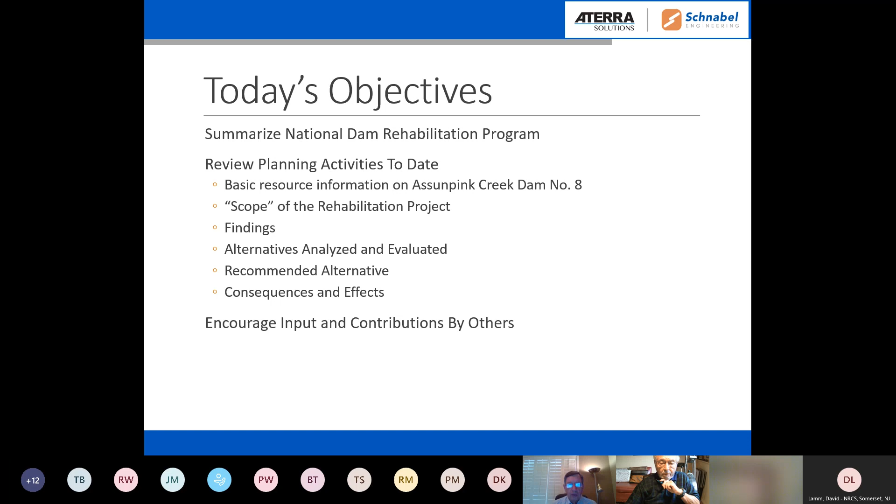We will have ample opportunity for input and contributions by others. As mentioned, the key players in the planning process include 6 actual local sponsors of the overall Assunpink Creek watershed. Hamilton Township is the lead for this particular dam, but there are also the Mercer County Soil Conservation District, Freehold Soil Conservation District, Mercer and Monmouth County, and the New Jersey Department of Environmental Protection, all active participants as sponsors of this project.

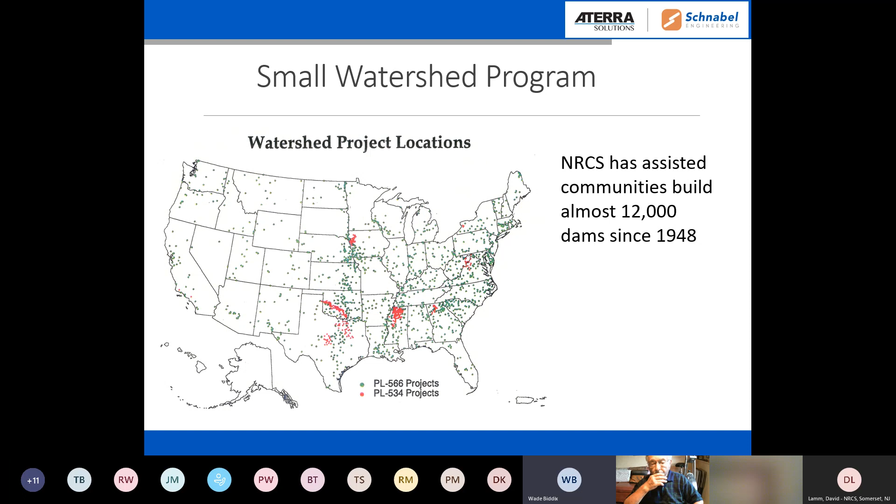Rehabilitation would be defined as extending the service life of the dams to meet safety and performance standards, prolonging beyond the original life, replacing deteriorating components, making repairs after catastrophic events, upgrading to meet dam safety laws, or potentially removing the dams altogether.

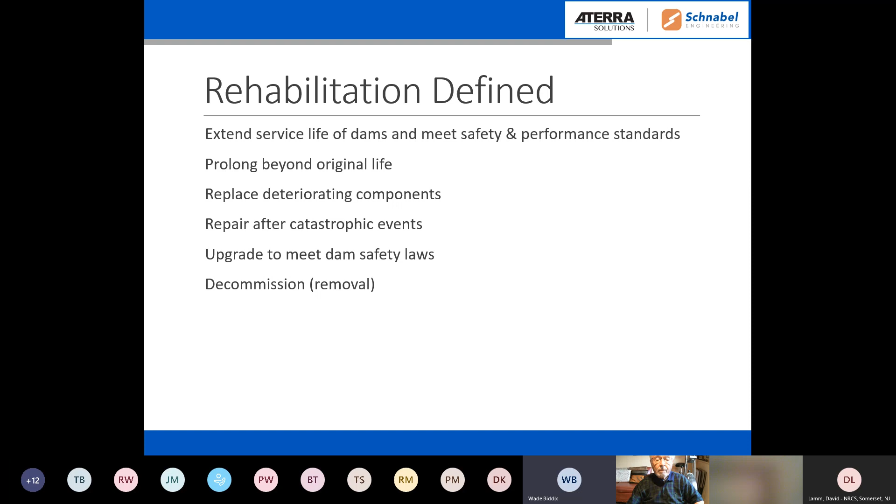The only dams eligible for rehabilitation under these programs are those originally built with either the Soil Conservation Service, which transformed into the Natural Resources Conservation Service within the U.S. Department of Agriculture.

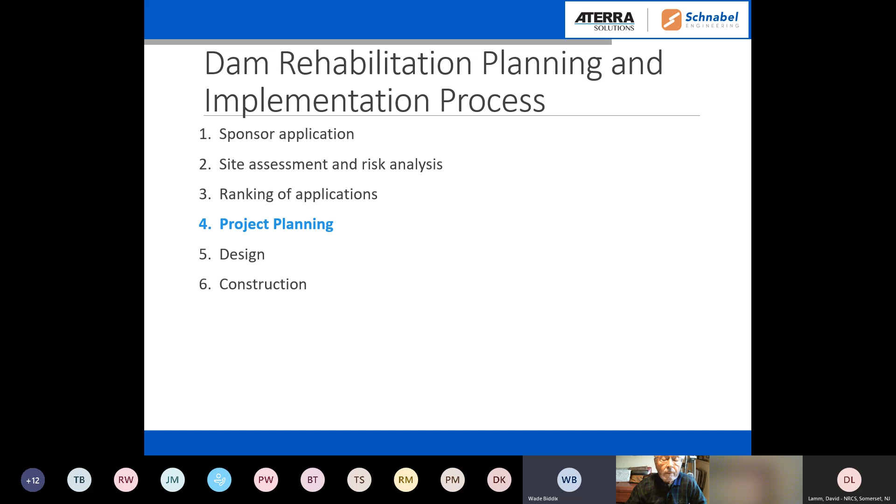The rehab planning and implementation process involves, as Dave mentioned, an application, a site assessment and risk analysis, a ranking of those applications, and then hopefully funding, moving into project planning and onto design and construction. We're well into this process, and hopefully we'll be able to complete a plan in the near future.

The cost share—Rich mentioned this a little bit, but to bring out the details—USDA Natural Resources Conservation Service funds 100% of the planning costs, so all planning costs are federally funded, and 100% of design costs, and then 65% of the total project cost, not to exceed 100% of the construction cost. So all NRCS staff costs are paid 100% by NRCS. The local sponsors' funds are 35%, which can be cash or in-kind credit. The only thing they have to pay up front without federal assistance are the permit costs.

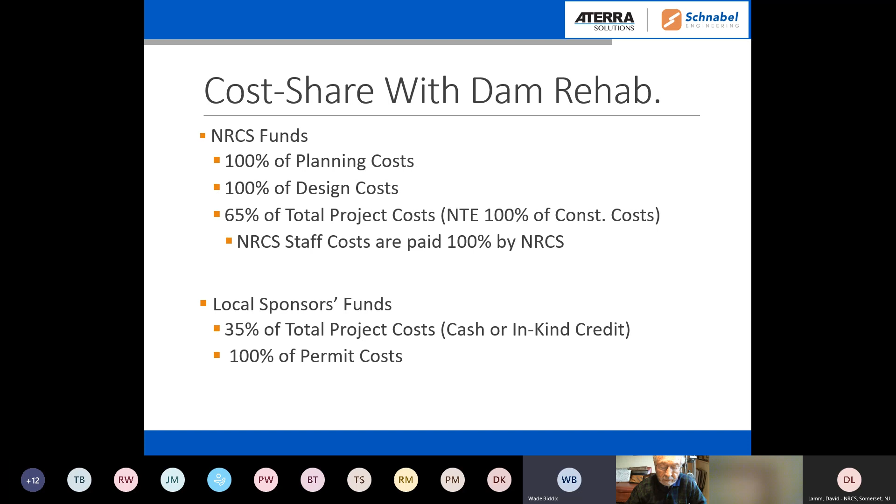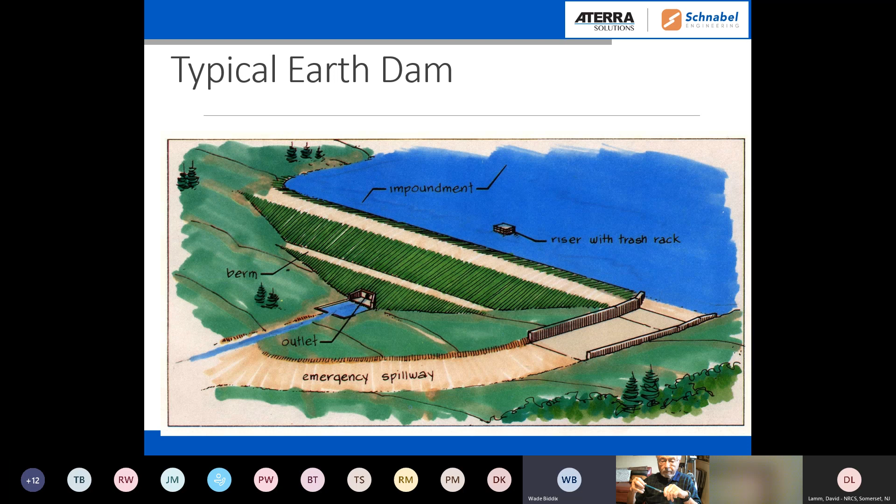Just so we're all on the same page talking about dams, I wanted to cover a little bit here. A typical earthen dam: the impoundment is basically the reservoir, or the permanent water that's out there. You have a riser with a trash rack normally, and then an embankment, a berm, an outlet, and an emergency spillway. The emergency spillway is basically the safety notch around the dam so the dam does not overtop in storm events.

Here's another depiction of that, just a typical cross section. The sediment storage is basically your normal pool—that's the area that would have your normal reservoir water. Then you have the flood storage that's up to the crest of the auxiliary spillway, and then the top of dam—you do not want the dam to overtop the embankment. Then you have a principal spillway pipe that goes through the embankment and exits and outlets downstream. So that's what we're talking about.

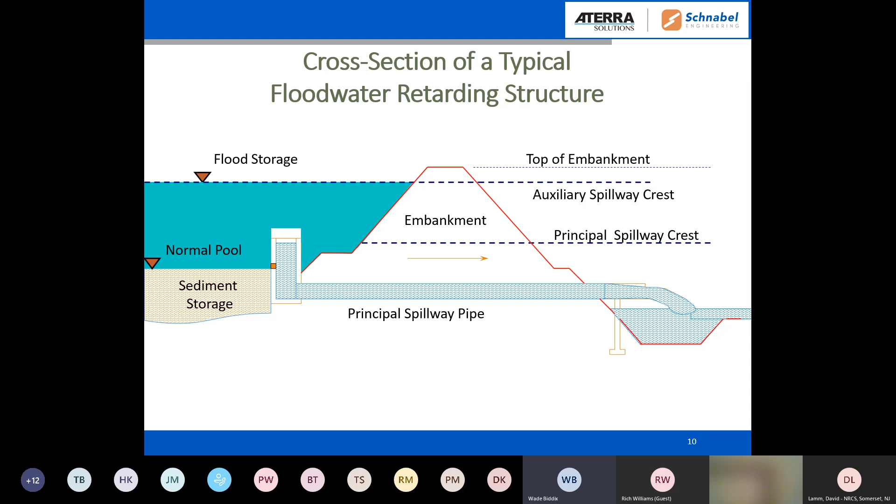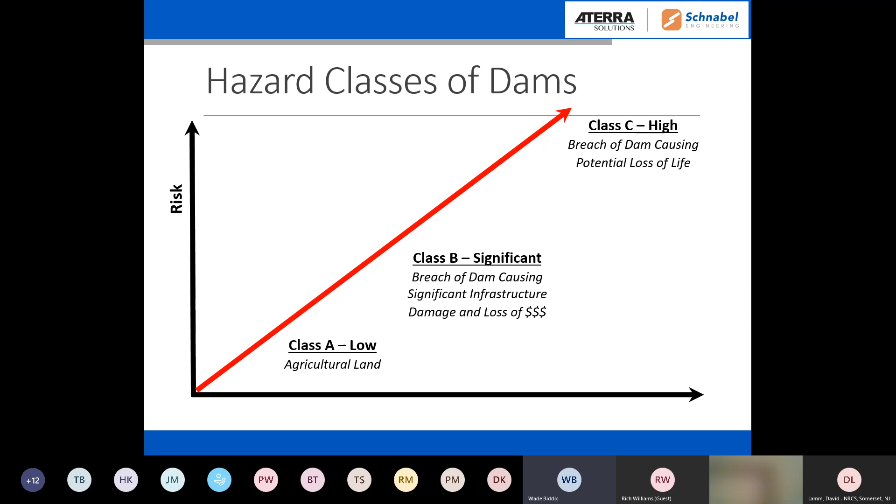As far as hazard classes of dams, on the left the risk goes up as the class of the dam goes up. So it's A, B, C, with A being low hazard, with failure primarily impacting agricultural lands or rural areas. Class B, or significant hazard dams, would cause some infrastructure damage and loss, but Class C, a high hazard dam, would basically cause potential loss of life during a breach. So this dam is classified as a high hazard dam.

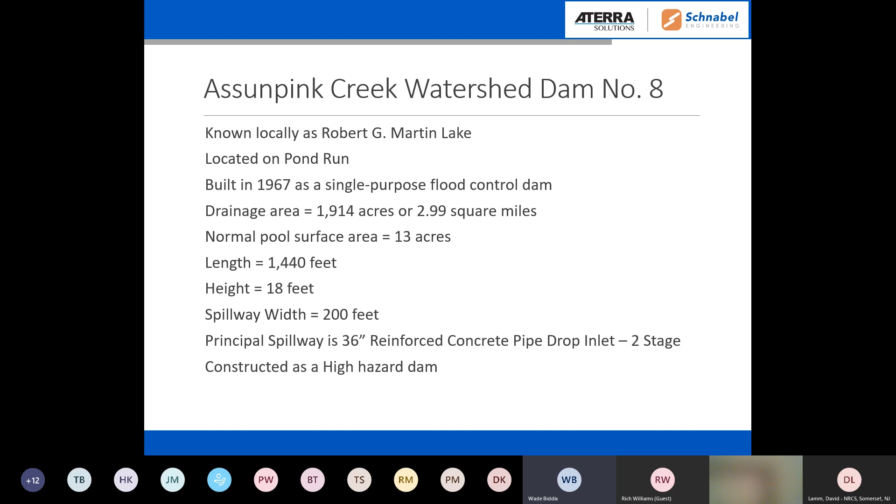Some statistics on the dam: it's known as the Robert G. Martin Lake, located on Pond Run, built in '67 as a single-purpose flood control dam. Some of these dams are built with other purposes such as water supply, recreation, or irrigation water. The drainage area is 1,914 acres, or almost 3 square miles, with 13 acres of surface pool—that's normal pool—and it's 1,440 feet long. The dam height is about 18 feet tall, with an emergency spillway that's 200 feet wide, and a 36-inch principal spillway pipe going through the embankment. It was constructed as a high hazard dam.

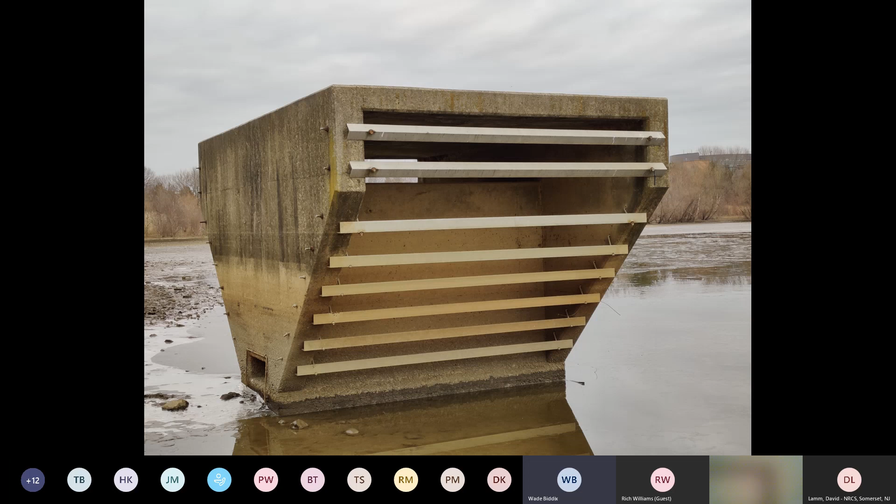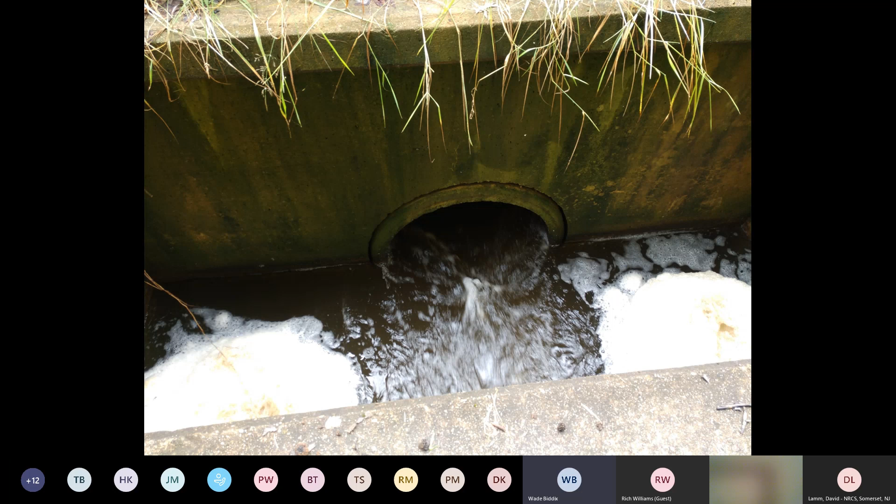Just some slides of the dam for those who may not be familiar with it. This is standing on the dam looking at the riser and the permanent pool or reservoir. Here's a closer view of the reservoir, and there's a little gazebo between the embankment and the auxiliary spillway. This is the outlet pipe below the embankment, which exits downstream.

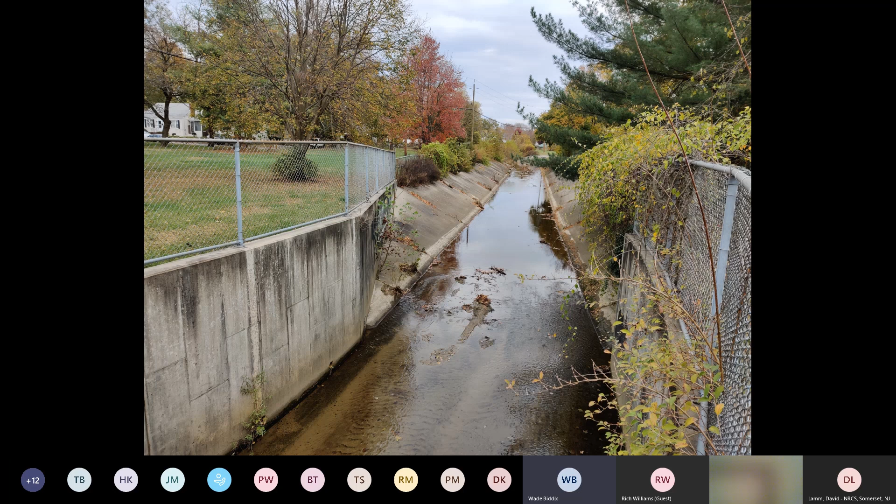This is the 200 feet wide auxiliary spillway, and that's the safety notch around the dam. This picture shows the concrete channel improvements downstream. As Dave mentioned, there's about two miles of concrete channel work also associated with flood control in this watershed.

Regarding the condition or current status of the dam, it's inspected annually and regularly mowed and maintained, so the town is doing a nice job of that. Breach inundation mapping was done back in 2015 by Civil Dynamics, and the assessment done in 2017 found two primary issues that needed to be addressed: the auxiliary spillway has insufficient capacity, and it is susceptible to erosion during design flow events.

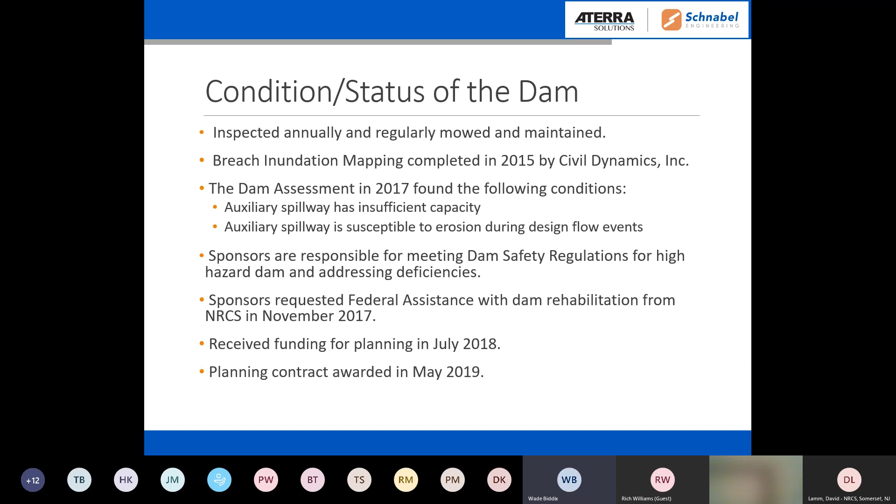The sponsors are responsible for meeting the dam safety regulations for high hazard dams and addressing these deficiencies. So New Jersey's dam safety folks are looking at these types of dams and saying you need to bring them up to current standards. Sponsors requested federal assistance in 2017, funding came in 2018, and the contract was awarded for planning in May of last year.

When we enter into a project, we take a look at all the different environmental laws and executive orders and so forth. The scope of a project is basically defined by the Council on Environmental Quality as the range of actions, alternatives, and impacts that will be considered in a planning project. So scoping is used to identify the significant issues to be analyzed in detail and to eliminate from study the issues that are not significant. We don't want to just be studying everything; we've got to narrow it down into what's actually relevant to the project.

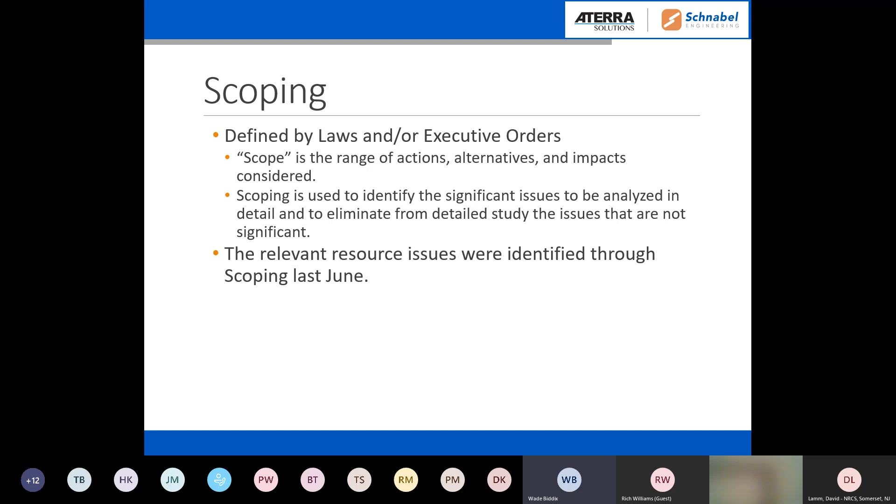Back in June of last year, we had a meeting in the town center and identified, through scoping, the relevant resource issues to be studied in detail. We grouped those into resource concerns for soil, water, air, plants, animals, and humans, asking the question: is it relevant, yes or no, to the proposed action? Now I'll go through some of those findings in relation to the resource issues considered significant during scoping.

Some environmental findings—thanks to ERM and EA for their work on the environmental analysis, digging through different databases for this information. The soils: prime farmland soils and soils with statewide importance are in the project area. I've highlighted 'project area' because there's an area of initial assessment when you start these things, and then we narrow that down to what we consider the limits of disturbance. Initially you look at the overall watershed, upstream and downstream—that's the project area—but the limits of disturbance will be a smaller area. You'll see that term come up later.

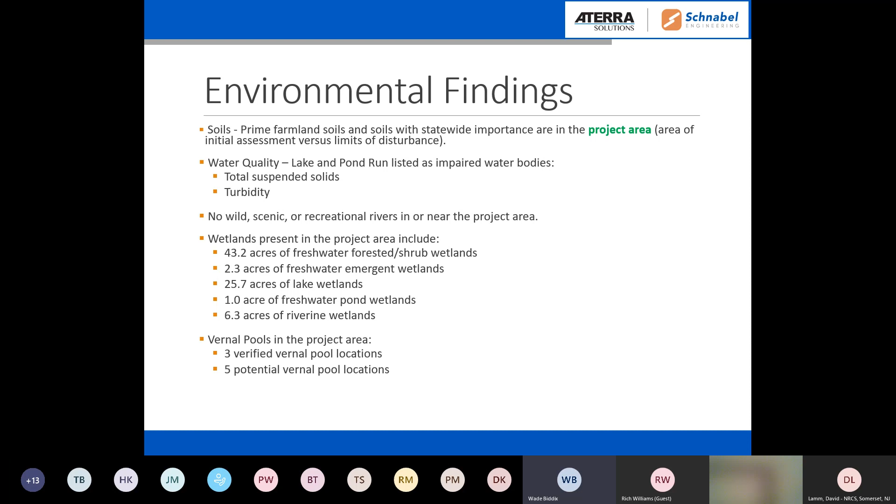Water quality: the lake and pond run are listed as impaired water bodies by the state for total suspended solids and turbidity. There are no wild, scenic, or recreational rivers in or near the project area. There are quite a few wetlands present in the area, with a breakdown of the different types and acreages. There are three verified vernal pool locations in the vicinity and five potential pool locations. The dam is within the interstate coastal zone under New Jersey's Coastal Zone Management Program, but the project site is not influenced by tidal areas.

The floodplain is listed by FEMA as a special flood hazard area, and the air quality does not meet the pollutant standard for ozone, making it a non-attainment area. For plants, there are no federally threatened or endangered plant species in the project area, and no state-listed endangered plant species. Regarding noxious weeds and invasive plant species across the entire state of New Jersey, there are 5 prohibited weed species and 19 restricted weed species.

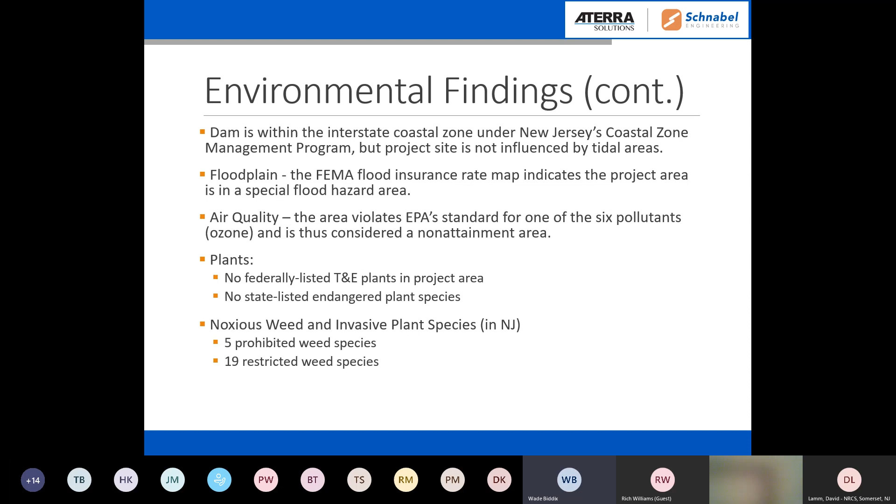No unusual fish and wildlife. Animals, the only thing we found is one federally listed T&E species, the northern long-eared bat, but that's typical for most areas in the whole Northeast. So that's not unusual to find that come up and be flagged. And again, the statewide database for species: several bird species are either endangered, threatened, or special concern, and there are 8 reptile and amphibian species that are species of special concern.

And some volunteers in the area have observed 2 species of special concern, Fowler's toad and eastern box turtle. And there's also prime habitat for the endangered wood turtle. But keep in mind that a detailed site assessment was not conducted overall. A lot of these are desktop kind of analyses to determine what we should expect in the general area.

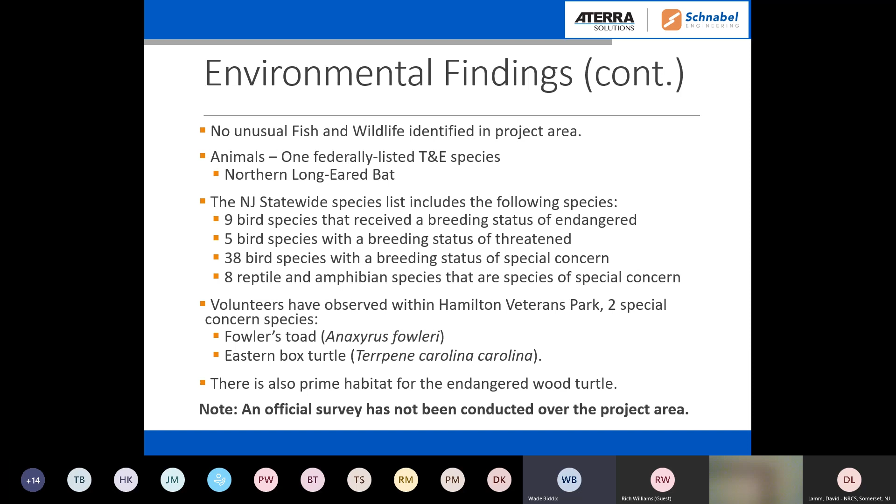Continuing on with this, no known invasive fish or wildlife species upstream of the impoundment within Pond Run or Veterans Lake. Bald eagles have occasionally been observed, but we did not find any nest sites within the project site.

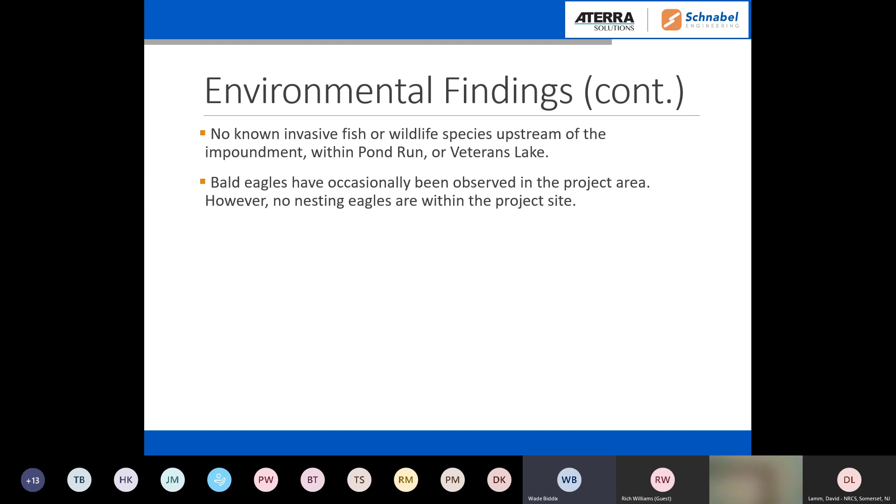Social and cultural resources. There are 2 historic districts, 5 historic properties, and at least 11 archaeological resources within a 2-mile radius of the project area. Consultation will be initiated soon with the various federal and state environmental agencies using the limits of disturbance. Following this meeting, these letters will be going out to the federal and state environmental agencies.

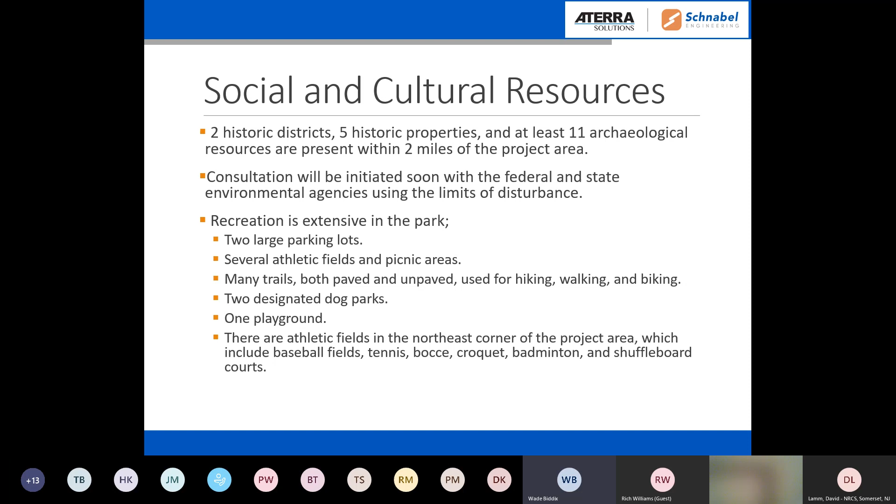Recreation, we found, is extensive in the park. Anytime you go out there, you can see that it's being extensively used. 2 large parking lots, athletic fields, picnic areas, biking, hiking trails, dog parks, playgrounds. It's very heavily used. The dam is located in the middle of the park, and it is not a federally designated park or natural area, but it is listed on the New Jersey Trails Association webpage as one of the great trails in New Jersey. So it is significant from a local use standpoint.

The visual aesthetics and scenic beauty of the park, we know, have impacts on tourism, recreation, and resident satisfaction. There is value associated with the dam and the lake for scenic beauty and outdoor activities.

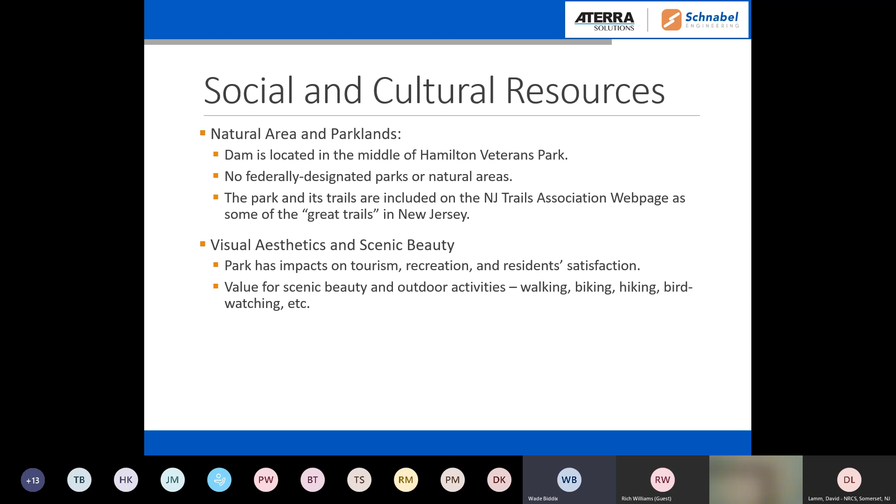The watershed was modeled with the dam in place and the dam removed. So here's what we found regarding the flooding impacts to downstream properties. Right now, there are 853 houses and 4 apartment complexes downstream of the dam, 49 commercial buildings, and 10 public buildings, for a total of over 900 buildings impacted by flooding in those downstream properties.

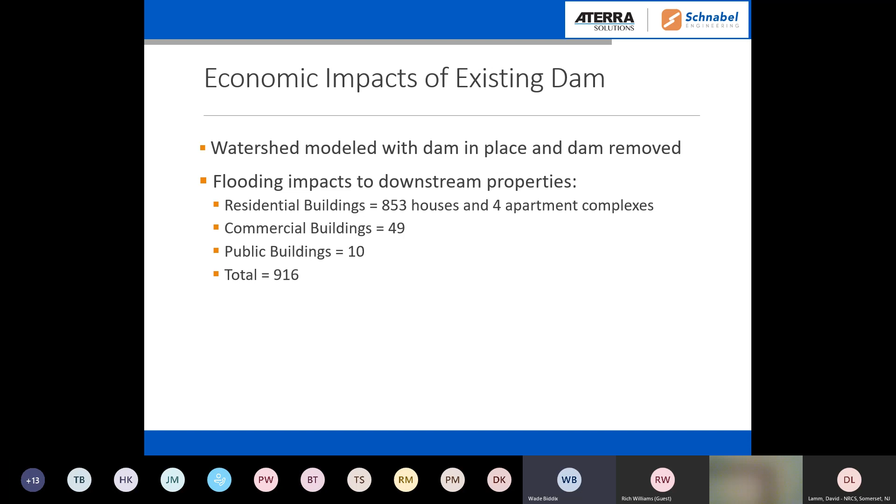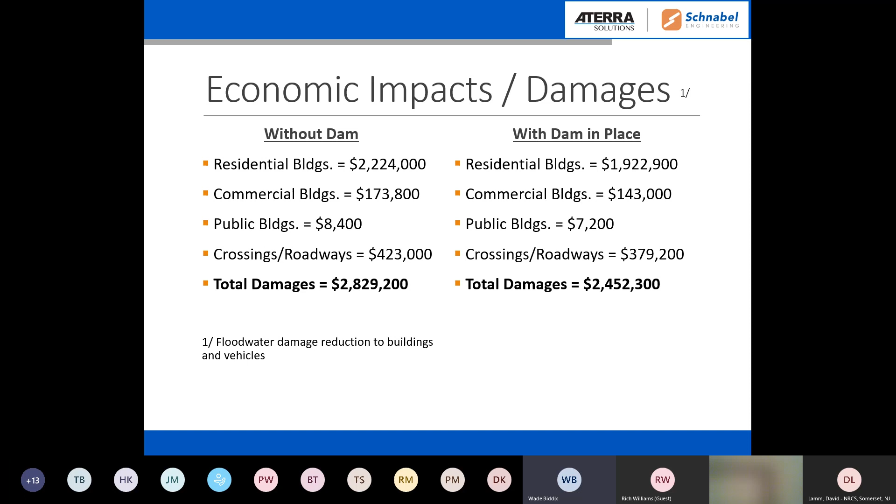So if you compare that, without the dam there's a lot more damages than with the dam in place. There's still damages, and we're primarily talking about all flood events. So these can be to different buildings, roads and crossings. It also includes any vehicles that would be parked in those areas downstream.

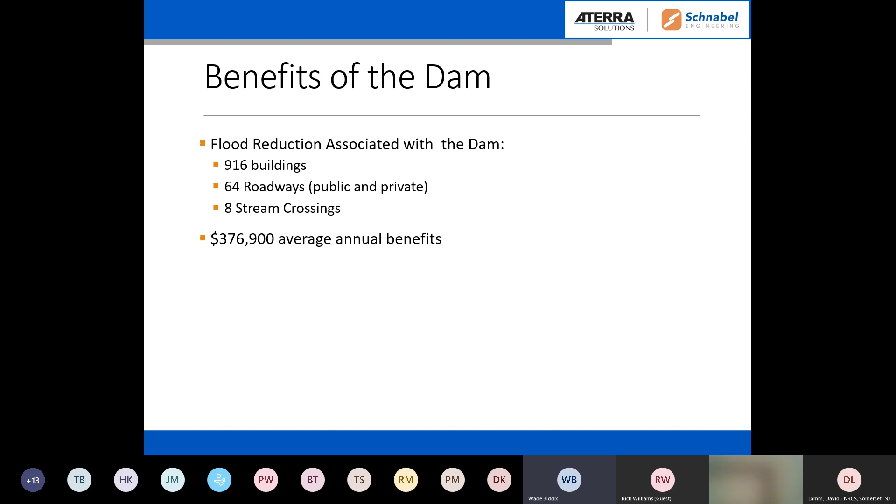So the benefits of the dam right now, you're getting flood reduction to those 916 buildings, 64 different roadways, public and private, and 8 stream crossings. So there's almost $400,000 average annual benefits associated with this dam.

So now I'm going to turn it over to Peter Maspus with Aterra Solutions, and he's going to take control and talk more specifically about the modeling and the work done on the dam upstream and downstream. All right, sounds good. I have control now, so I'll move forward and discuss some of the analyses that we performed as part of this project.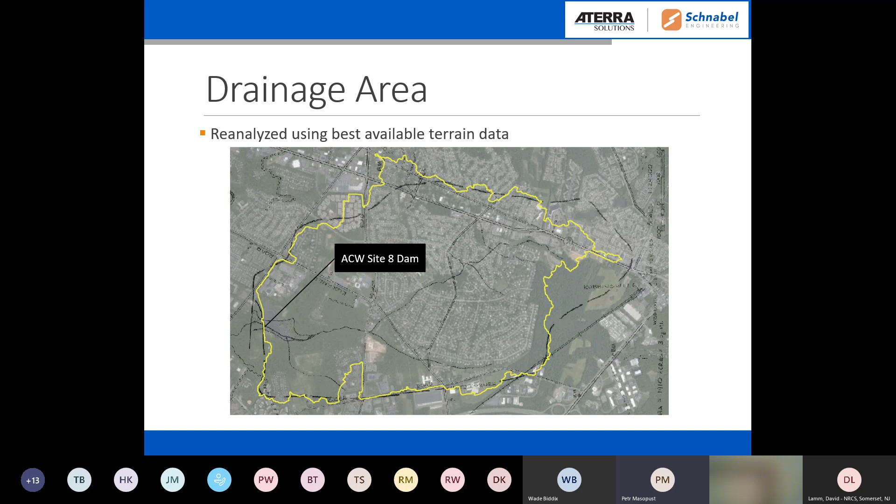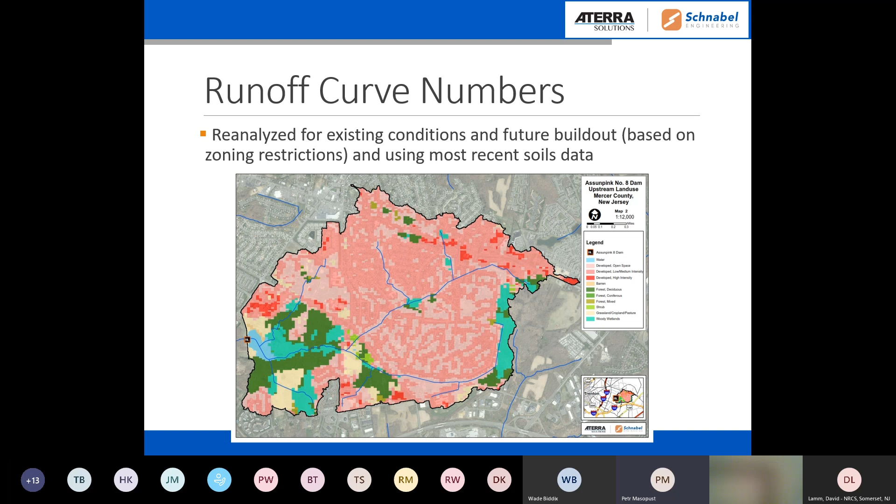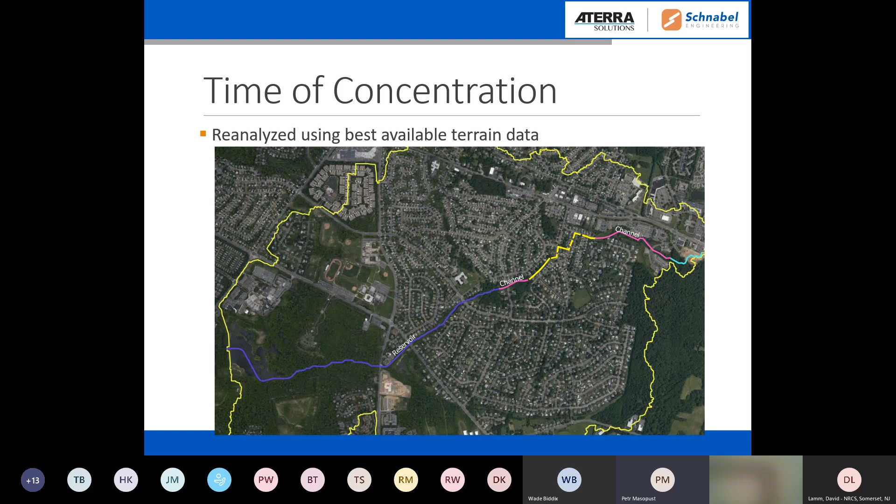We also looked at runoff curve numbers, which essentially define how much volume is conveyed to the dam from the watershed. We looked at existing conditions and also future build-out conditions, which were calibrated based on land use or zoning restrictions in the watershed. We evaluated time of concentration because the watershed is a lot more urbanized than it was back in the 60s when the dam was constructed. So that shows the longest flow path, essentially from the headwaters all the way to the dam.

And we also obviously looked at rainfall data and other parameters that may have changed since the time the dam was constructed. And the results of the analysis showed that several NRCS criteria are not met, and confirmed that the dam is in need of rehabilitation.

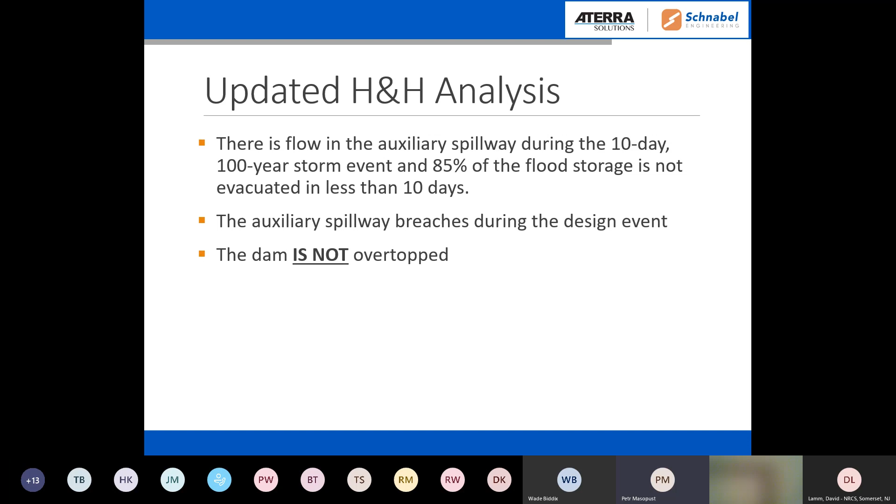Good news is that the dam is not overtopped during the design event. So that kind of drove our analysis or alternatives evaluation. But we confirmed that the auxiliary spillway breaches during the design event. And we also confirmed that one of the NRCS criteria for principal spillway capacity and flood storage are not met. So that also needed to be addressed as part of the rehabilitation design.

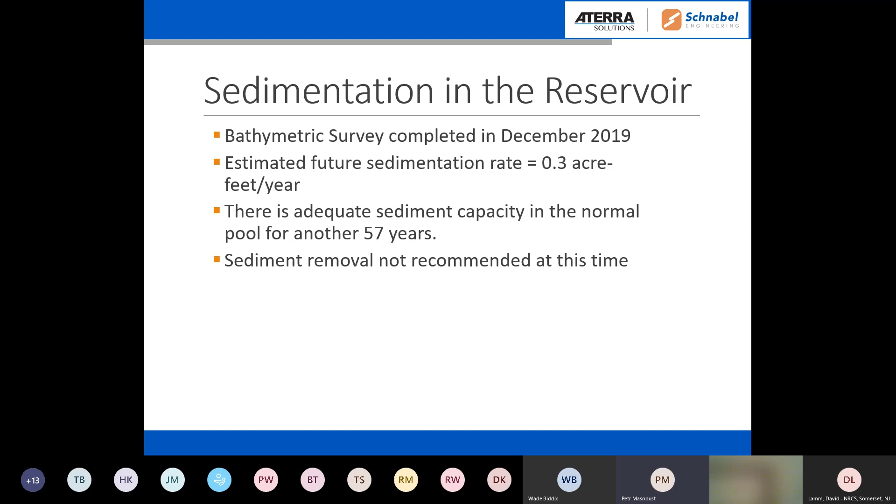We also performed a bathymetric survey and sediment survey in the reservoir to evaluate the current stage storage relationship, and to also see whether the dam has capacity for future sedimentation. And the results of the survey showed that there is additional capacity for at least another 57 years, and therefore we're not recommending sediment removal at this time.

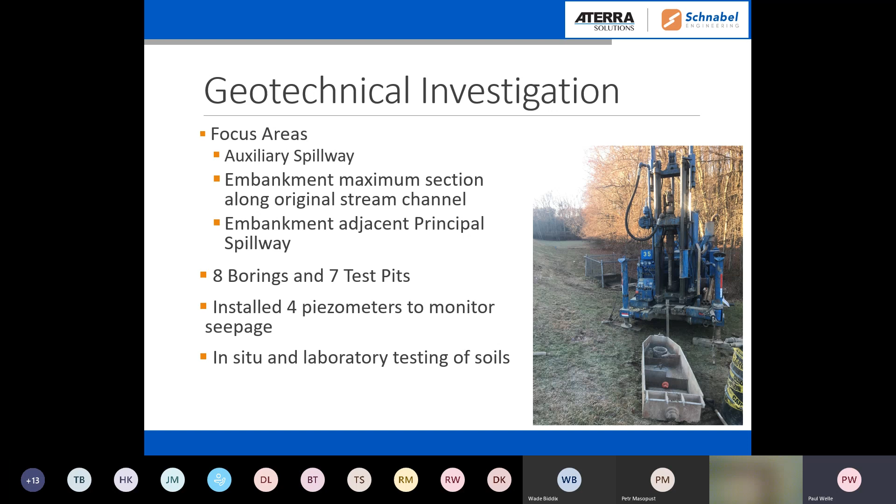And we took the results of that, some of which we actually did some testing in the field and additional testing in a laboratory. After we had all the test results, we performed a geotechnical analysis. One of the things we looked at is what we call the filter compatibility. We have toe drains or embankment drains near the toe of the dam. And that's because most dams have some type of seepage through the dams. The question is how much. Now, these toe drains are intended to intercept any seepage through the embankment so that it would not cause any problem as far as stability of the dam.

And one way to keep the soil from moving through these filter drains is to have a 2-stage toe drain filter. These stages of sand and gravel are intended to keep the soil where it's at, but still allow the water to flow through it. We found that this filter drain system meets the criteria that was in existence at the time the dam was originally built. The criteria have become more stringent, but it still meets the older criteria, even though it would not meet the existing criteria. But from what we can see, it appears that these filter drains are functional, and as a result, we do not consider repair to them to be warranted.

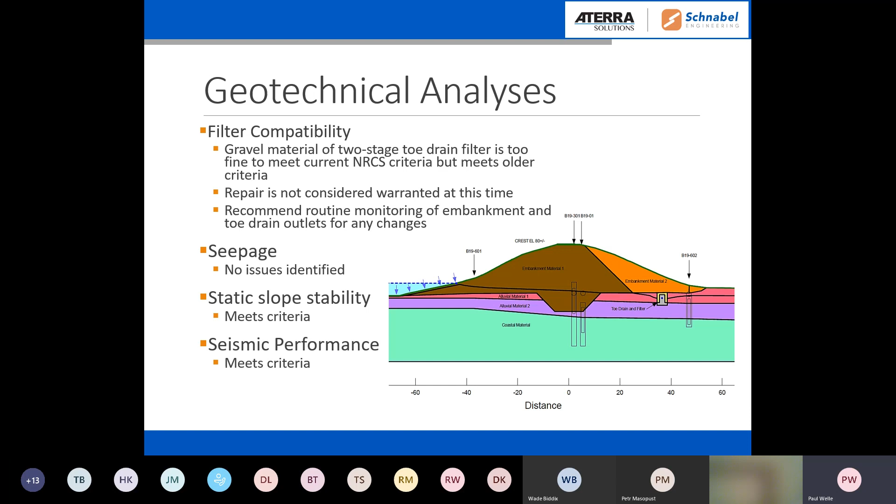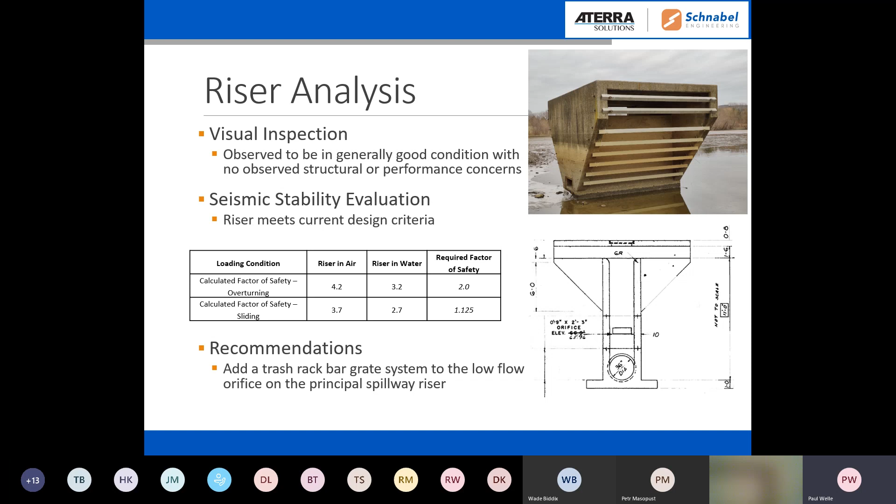We do have one recommendation. If you see on the left-hand side, just above the water, you see a rectangular opening or orifice. And this is what maintains the water at the normal pool elevation. And we do recommend that a trash rack be installed on there so that trash would not get into the riser and cause any plugging of the riser itself.

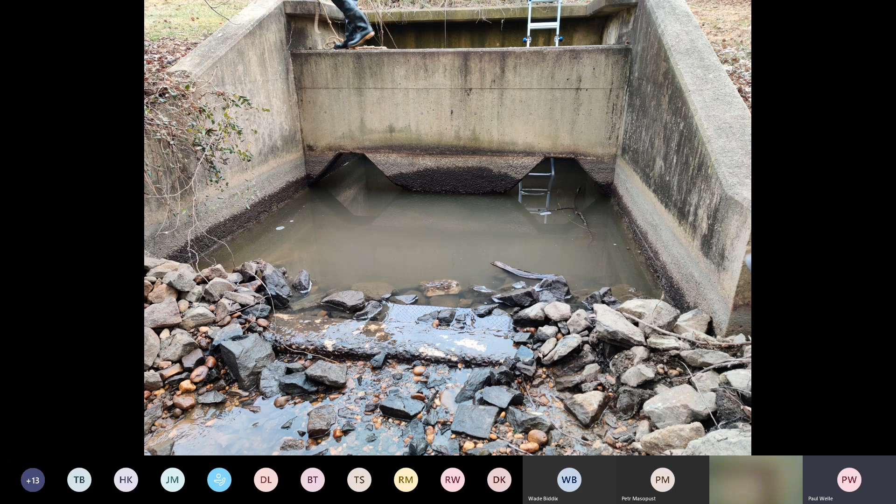This is the impact basin or outlet of the principal spillway conduit. It is a concrete structure that is in good condition. You do see, though, that in the stilling basin in the foreground, you see some riprap in that stilling basin, and that riprap should be removed.

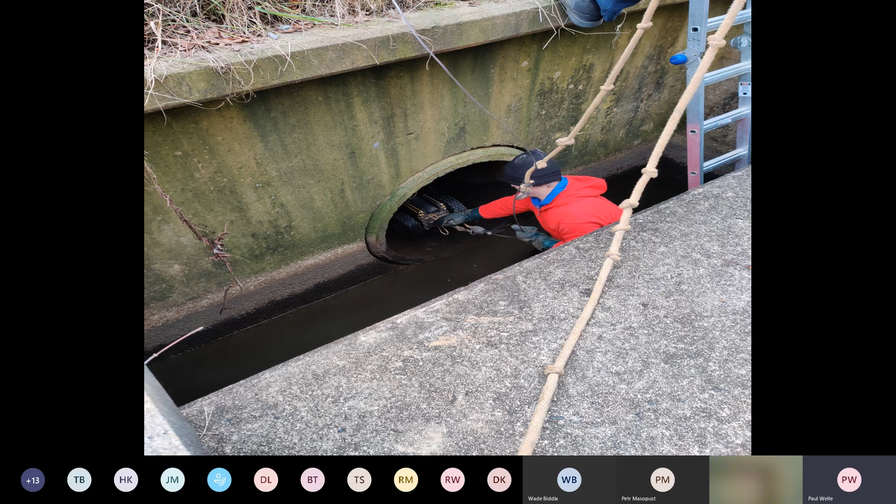In addition to evaluating the riser, we also put a camera, a TV camera, up through the conduit itself and found it to be in good condition, that the joints are tight, that it has fared well over the years that it's been in service. We also used a similar camera to look at the toe drains, and we could look at the portion of the toe drains that are parallel to this spillway, but then there are a couple right-hand bends in the toe drains, and we could not actually look at them.

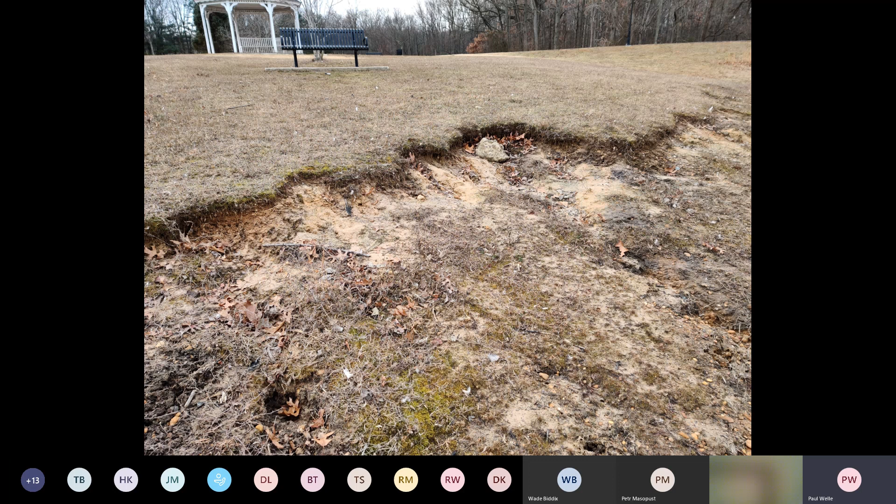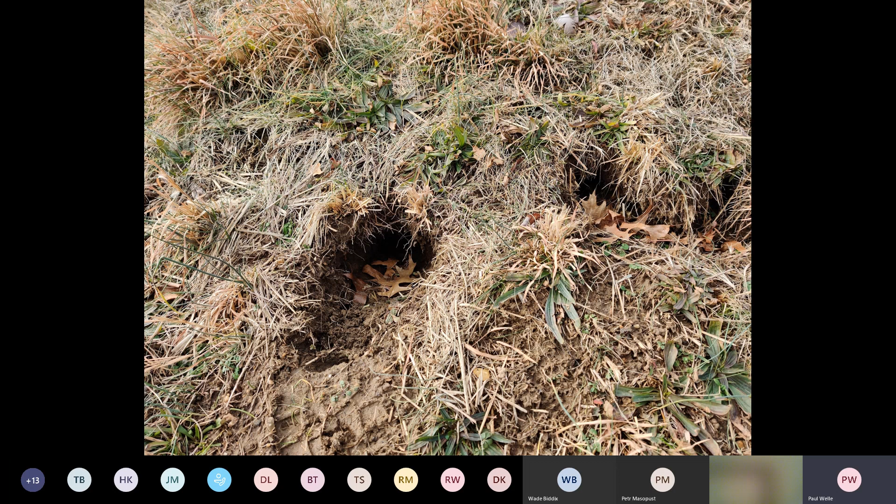So I'm going to turn it back over to Wade for his continued discussion. Okay, thanks, Paul and Petr. And what I'm going to cover now is a little bit just to talk about auxiliary spillway flow.

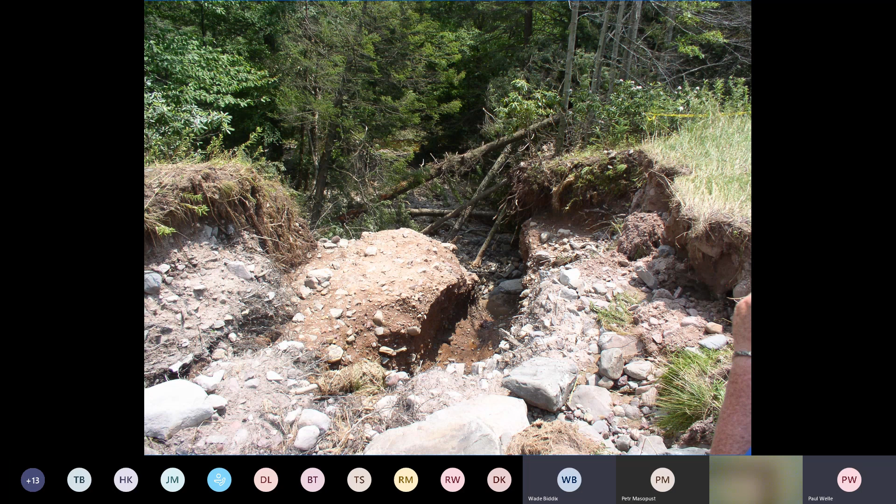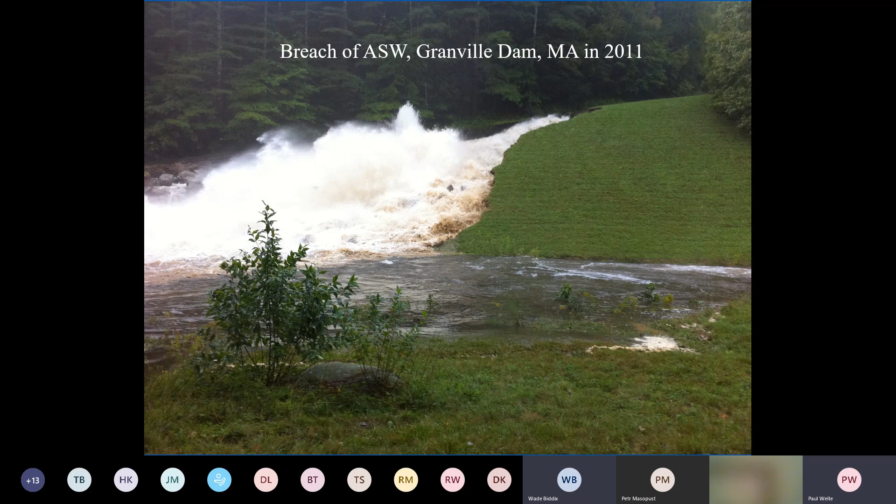Here's another auxiliary spillway breach up in Massachusetts in 2011, Granville Dam, and you can see this is actively flowing here. It's eating away. Here's as the water's receding a little bit, and you can see how much damage is caused there. So this can happen. It can cause the dam to fail, and depending on how rapid or severe this is, it can cause devastating impacts downstream.

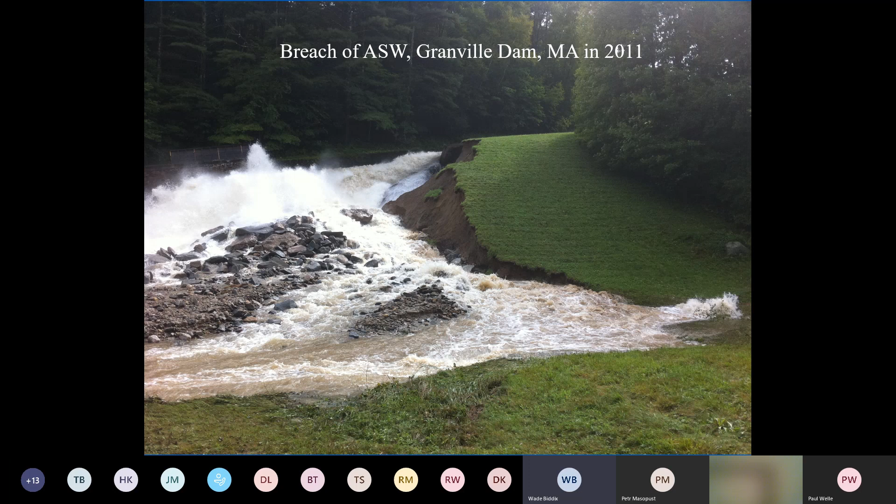So now I want to go into alternatives. We're going to transition a little bit. We've talked about the existing conditions of the dam, the different components of the dam, environmental, social, engineering. And now I want to talk about what we've considered for alternatives to rehabilitate the dam. Some of these we considered but eliminated from detailed study, and here's some of the reasons for that.

We talked about, well, can we raise the dam or the crest of the auxiliary spillway? But this option really didn't make sense because the auxiliary spillway, we determined, had capacity to pass the freeboard hydrograph, which is a 6-hour probable maximum flood, but it doesn't meet the stability integrity criteria. Basically what that says is it would erode through the auxiliary spillway during that design storm. So raising the auxiliary spillway or the top of dam would also have a negative effect on the upstream property. So that was eliminated.

We did not want to raise the top of dam or the crest of the auxiliary spillway. We also looked at decommissioning, and that would all include addressing any induced damages to downstream properties, roadways, and crossings. So with those 916 buildings, and you saw the number of roadways and crossings, that was calculated to be greater than $30 million. So we eliminated that for exorbitant cost.

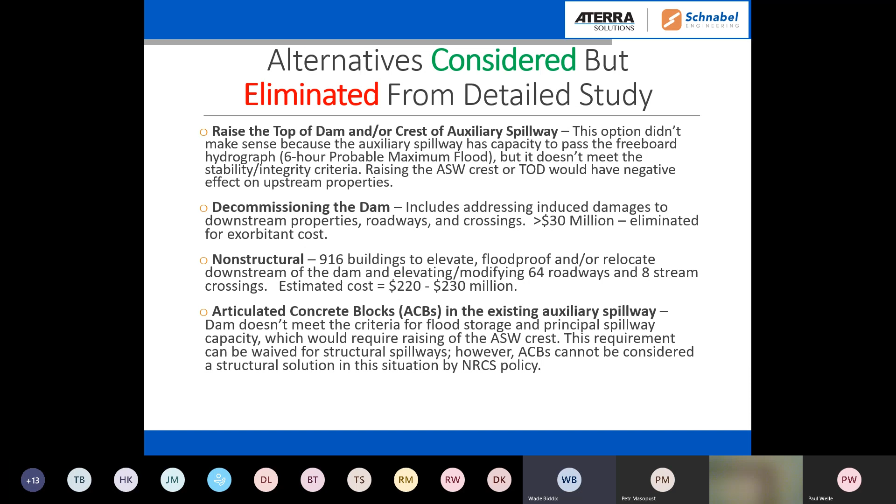So we also said that wasn't reasonable, and this requirement can be waived for structural spillways. However, the articulated concrete blocks cannot be considered a structural solution by NRCS policy. So we've eliminated those options. So then we started looking, I'll talk a little bit about, if you look at the middle left of your screen, that little box.

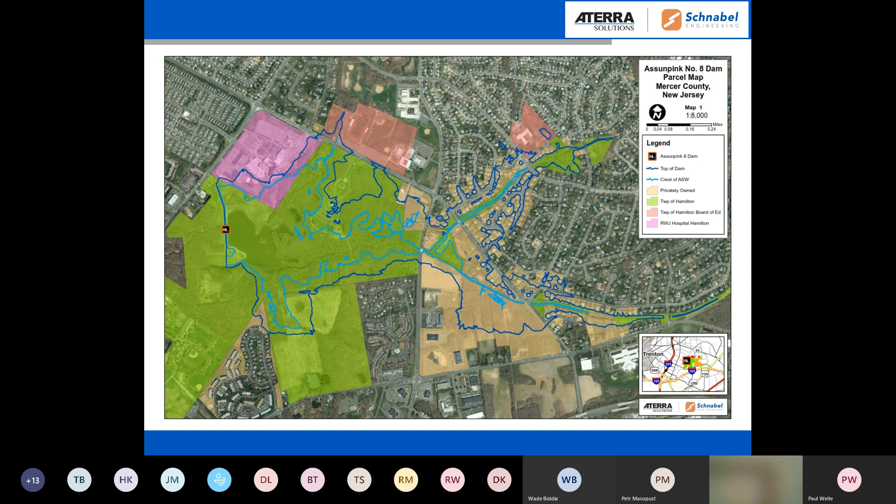We did an analysis to determine what's the existing elevation of the auxiliary spillway. That aqua line, the light blue line, is the existing auxiliary spillway crest. The dark blue line shows where it will go all the way up to the top of dam. So if you start looking up in the right center of the page, you can see where the top of dam elevation starts getting into a lot of roads, a lot of homes. And so we had to take a look at that and determine, in a worst case scenario, what kind of impacts we will have here.

So here's what we looked at from a land rights or an easements kind of issue. For the original construction back in 1967, the town purchased or acquired land or easements to the crest of the auxiliary spillway elevation, and in today's elevations, that's 73 feet. Our economist performed a flood pool risk analysis for all areas below the top of dam, and we determined that there are no floodwater impacts to habitable dwellings below the 1,000-year event. So you could have a very large storm and you would not be backing water upstream of the dam into people's homes.

But if it went all the way to the top of dam, and this is the worst case scenario, there would be 55 houses, 5 public buildings, and 2 commercial properties impacted at the top of dam. So we'll talk about that a little bit later.

We also looked through the updated watershed modeling. It was determined that the 100-year 24-hour storm level upstream of the dam was actually higher than the crest of the auxiliary spillway elevation. If you look at those 2 highlighted numbers there, the crest of the auxiliary spillway is at 73 feet and the 100-year 24-hour storm is about a foot higher. NRCS policy requires the minimum land rights for dam rehabilitation to be the crest of the auxiliary spillway elevation or the 100-year 24-hour storm elevation, whichever is higher.

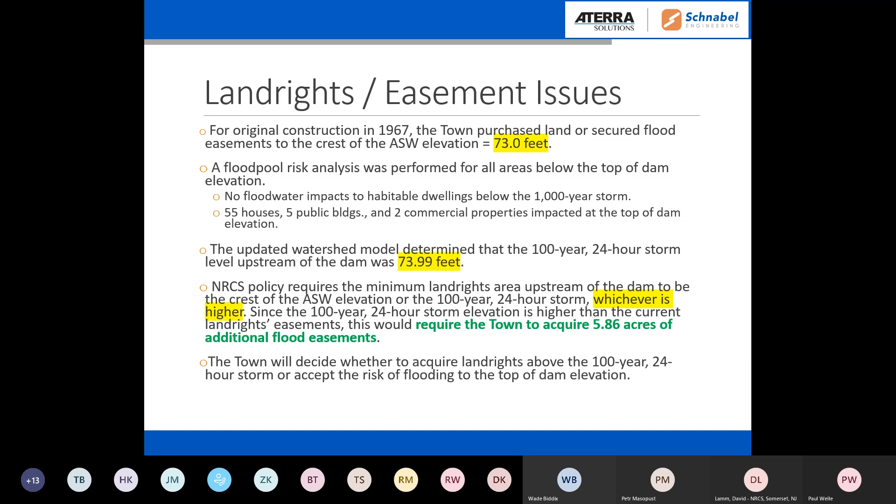So now we've talked about stuff that we've eliminated and considered, but now talking about the alternatives that were evaluated and analyzed in detail. We looked at no action for any of these projects. What if the federal government is not involved? What if there's no federal funding for dam rehab? What would the local sponsors do to try to address these issues? So we considered the no action, and we'll talk about that in a little bit.

But we also looked at one of the key ones, which was to look at armoring the existing auxiliary spillway. One way of doing that is with roller compacted concrete. That's a little easier to handle, and it's not as much forming involved with that. So roller compacted concrete in the existing auxiliary spillway for armoring.

We also looked at a straight drop concrete spillway over the top of the dam. This would involve berming up the existing spillway and just building a spillway over the top of the dam. The other alternative was to look at a labyrinth weir - Peter's going to go into a little bit more detail on some of these in a minute - but the labyrinth weir concrete spillway over the top of the dam would again involve berming up the existing auxiliary spillway.

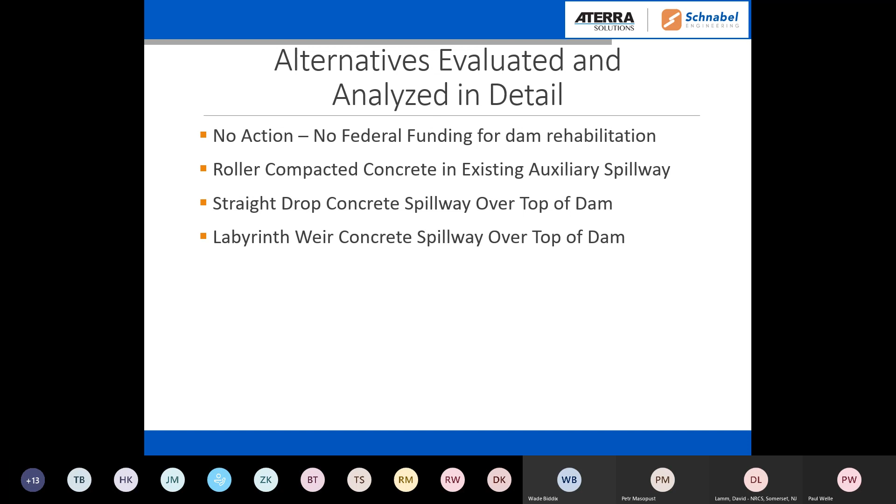So those are the 4 alternatives that we analyzed in detail, and I'm going to turn it to Peter, who's going to go into some of the conceptual design of those alternatives.

Thank you, Wade. So moving to alternative 1, which was the roller compacted concrete protection of the auxiliary spillway. This alternative resembles the existing conditions the best. You're essentially doing most of the work within the auxiliary spillway crest, shown on the left side of the drawing, and we propose to armor the control section and the exit channel of the auxiliary spillway, and also the side slopes of the spillway.

Once the roller compacted concrete is placed, we'll also add topsoil to the spillway, and that would be seeded to improve the visual appearance of the spillway.

Paul talked about the geotechnical analysis that was performed, and the fact that there was a need to install the filter diaphragm - it was not quite required back then, but it would be required under current criteria. There was a way to request a waiver from this particular requirement, but we also proposed to show where the filter diaphragm would be installed and the replacement of the toe drains as well.

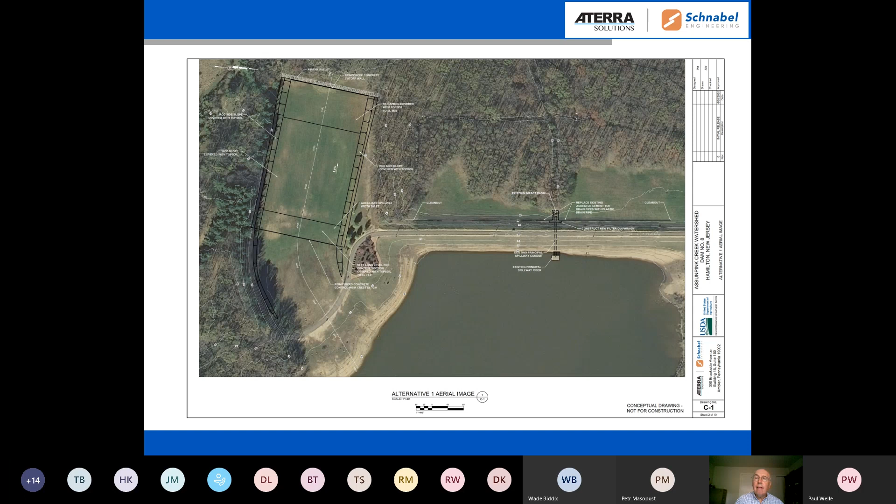On the next slide, you can see an example of how an RCC spillway would likely look, except in this picture from Georgia, you don't have the topsoil covering the concrete.

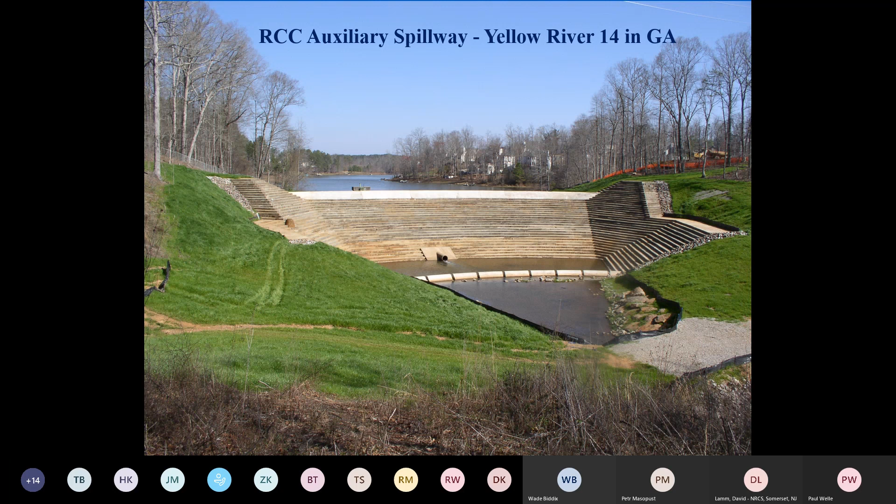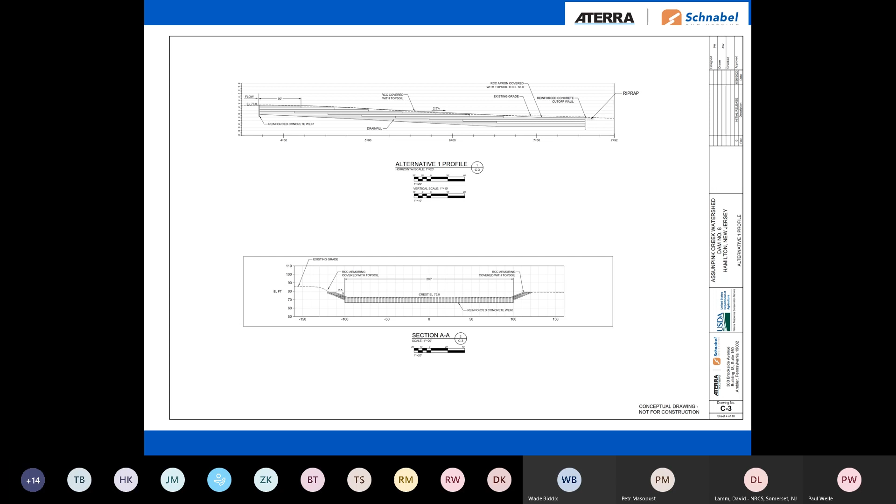Alternative 2, as Wade pointed out, was a straight drop spillway through the main dam embankment. The width of the spillway would be 160 feet. We have to excavate or remove the existing stilling basin and excavate along the entire width of the straight drop spillway.

We'd also have to construct a berm in the existing auxiliary spillway to prevent any flow leaving in that direction, because remember that spillway is vulnerable to breaching. We would also construct a pedestrian bridge over the weir, so the dam or the park can continue to be utilized the way it is utilized now.

You actually have a similar type of structure in the Assunpink Creek watershed. It's actually incorrect - it should be number 6 dam. But this particular structure is much wider and more robust than what would be the alternative for dam number 8.

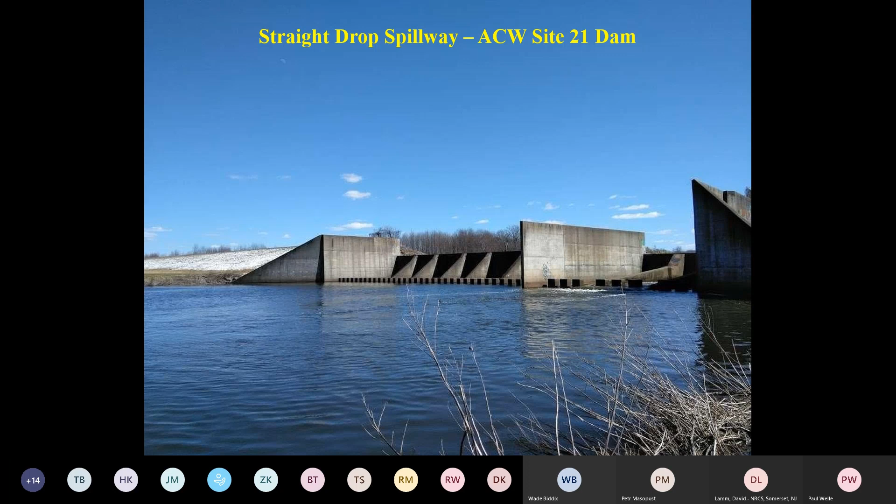Moving on to the third alternative evaluated in detail, the so-called labyrinth weir. It's very similar to the second alternative we just went over, with the exception that the width of the labyrinth would be narrower, about 110 feet, due to the configuration of the labyrinth weir. You can see that the labyrinth has the ability to convey a lot more flow through the spillway.

The labyrinth weir would be staged, so one of the cycles would be lower than the higher one, and that's really to accomplish the same flow through the spillway during the 10, 20, 50-year events when the spillway is engaged. So it was meant to accomplish the same flood protection downstream without compromising or changing any upstream impacts.

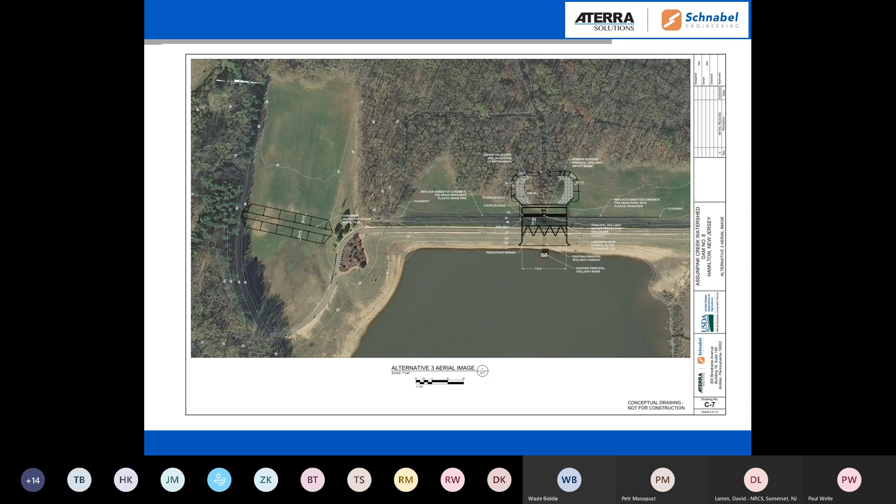The next slide shows an example of a labyrinth weir that was constructed recently in Virginia. You can see that this particular one doesn't have a pedestrian bridge over it. I assume there was no need for that, but we would also be installing a bridge over the weir at Assunpink Creek watershed dam number 8.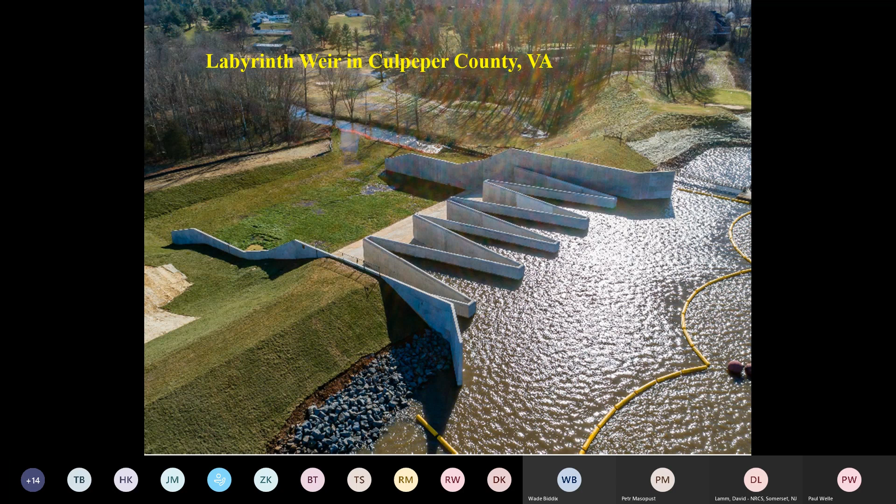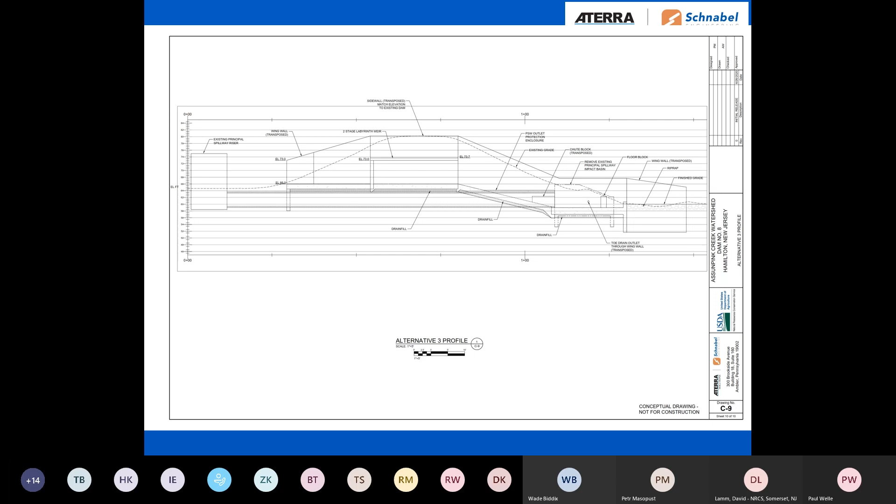I think I'm going to turn it over to Wade so he can talk about the limits of disturbance and access points to the area. Okay, thanks, Peter.

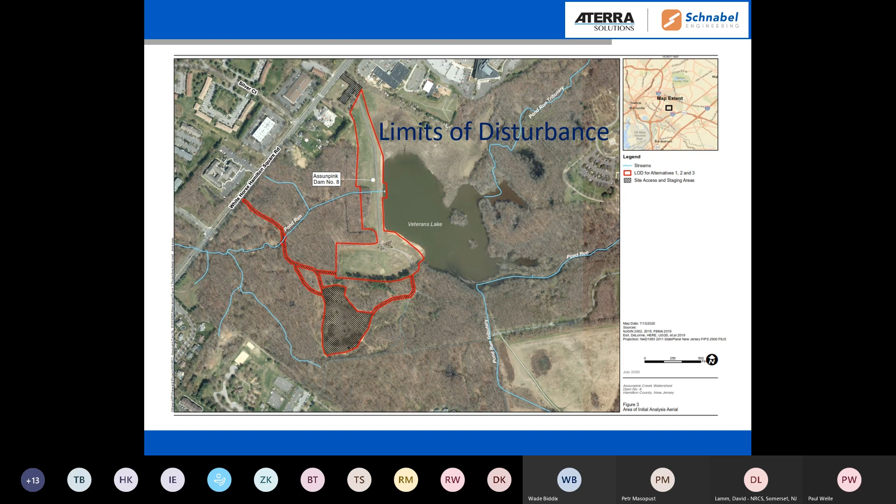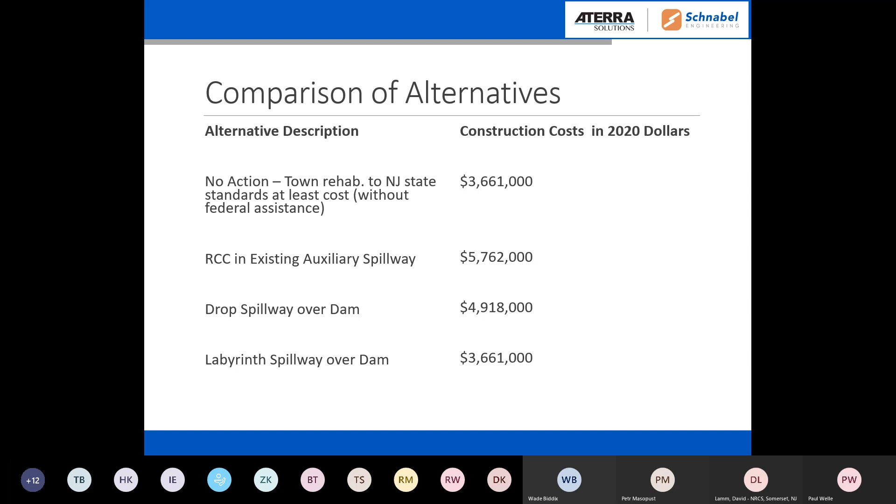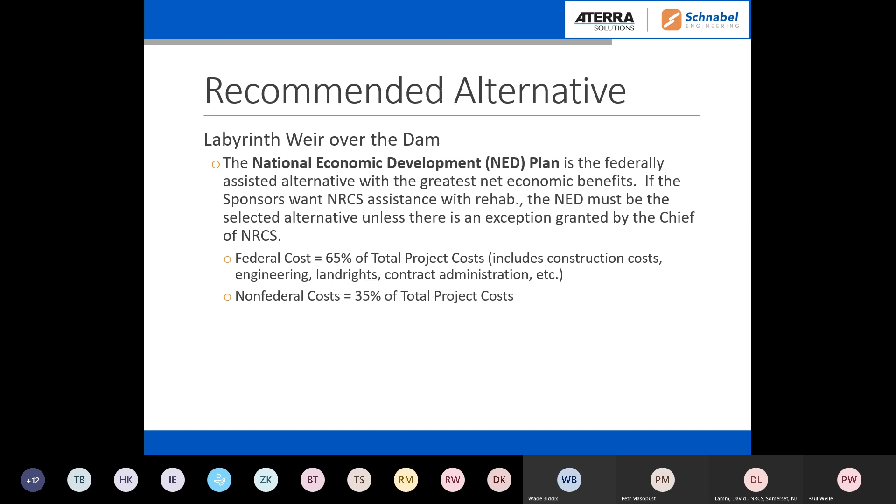The federal cost for construction would be 65% of total project cost, and that does include construction, engineering, land rights, and contract administration. Everything is within that total project cost, it's not just the construction. And then the non-federal cost would be 35% of that.

Moving on to some of the environmental effects, and we're getting close to the end here, so hang with us. Keep in mind here that we're evaluating the existing conditions that already have a dam in place. We felt like this qualified for a categorical exclusion or an environmental evaluation rather than an environmental assessment or environmental impact statement. So we are modifying the original footprint of the dam, and these impacts are changes with the dam in place, not a new dam.

Some of the environmental resources located within that limits of disturbance that we showed you: there's about 2.36 acres of prime farmland. We're not saying all these acres would be impacted, it's just within that limits of disturbance, those lines that we drew. A lot of these have already been impacted by the original construction.

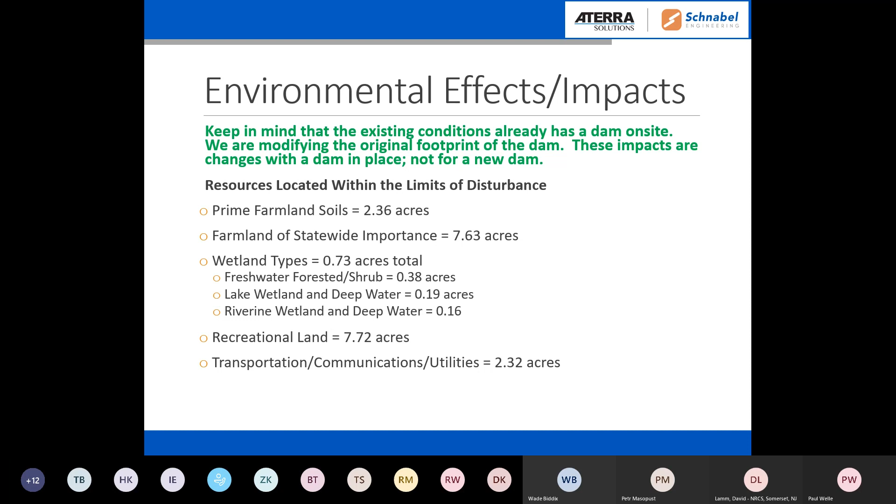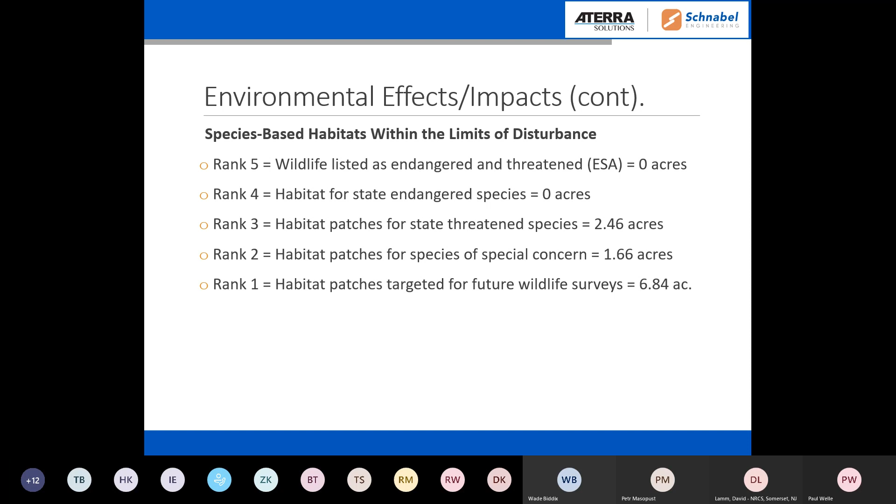We mentioned earlier the federally listed threatened species, the northern long-eared bat, but we feel like we can avoid impacts with time of year restrictions for any tree removal in areas that would be impacted. So that's a good thing.

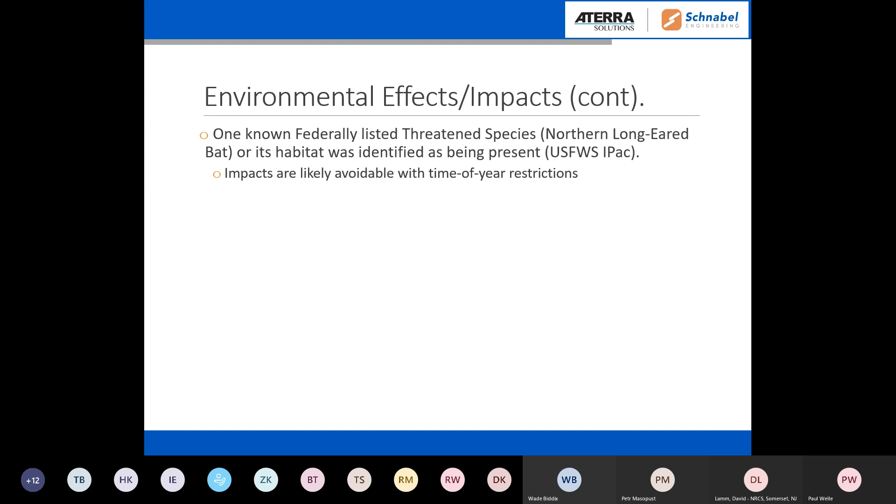Some local issues to consider during construction: the parking lot would be closed on White Horse Hamilton Square Road. We would require access to both sides of the dam and both sides of the stream, because as we're building the Labyrinth Weir, you have to have access to both sides. So we need 2 staging areas — that parking lot and the old staging borrow area.

Large trucks would be in the area hauling materials, supplies, concrete, cement, things like that. For the public at large, the construction areas and parts of Veterans Park would be closed for one construction season. We felt these were the issues that would be more local in nature.

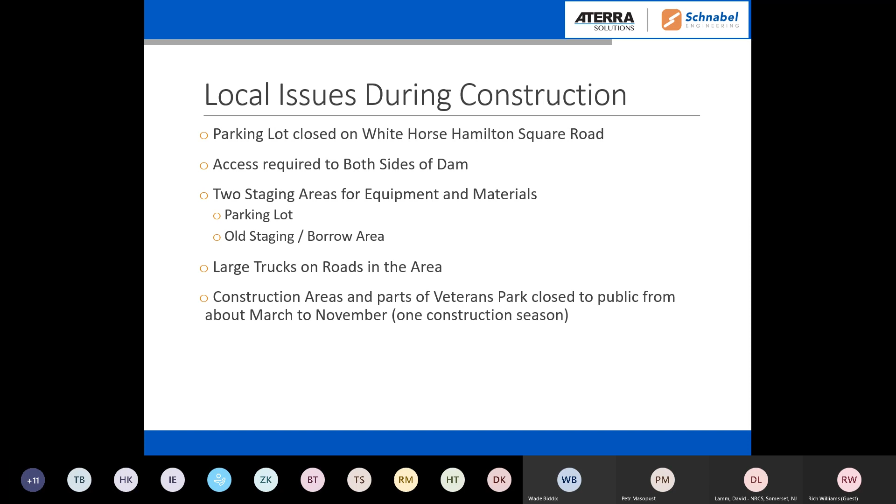For the planning schedule, we're getting close to completing the evaluation of alternatives — you've got another couple weeks on that. The town will accept comments on these recommendations for about another month, and I'll give you the details on that in a minute. Then we're talking about preparation of a document, a supplemental plan to the original plan, with different phases, finished up in February of next year.

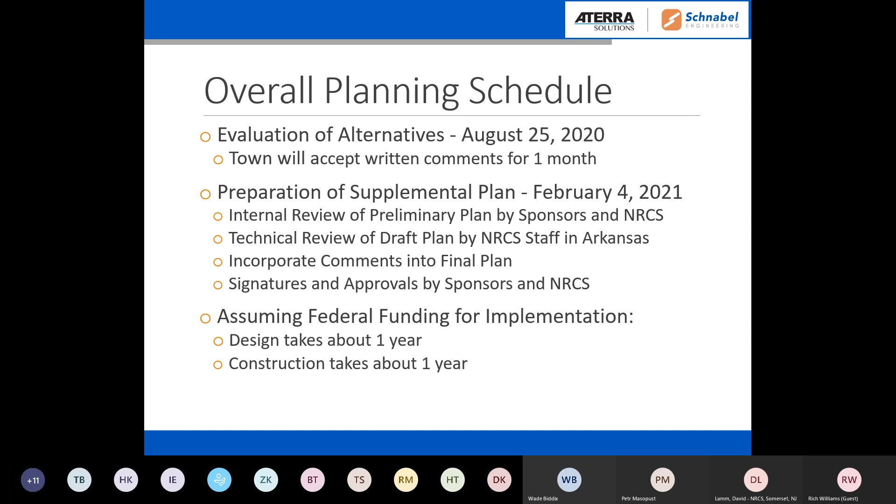There are internal reviews and technical reviews by NRCS staff out of Little Rock — they have a water management center there. We would incorporate those comments into a final plan and then have signatures and approvals. That process will be finished up by February of next year. Then, assuming the project gets funded, design would take about 1 year and construction about 1 year.